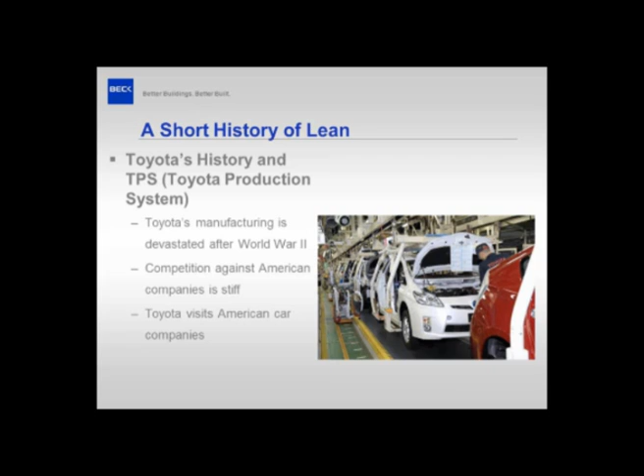So it started in manufacturing. It's a mindset of continual improvement, and you're benchmarking all of these improvements. So it's not just having a retrospective and forgetting about it, but it's tracking this and making sure that you are improving, through some form of data that you can track. Trust in team members is a big part. If you are a supplier of Toyota, it is very crucial that you are a part of lean, but then also that you become trusted as well as you begin to trust Toyota. Predictability, that's something that you'll hear a lot of in lean construction as well as lean manufacturing, is trying to create the most predictable workflow possible.

And then eliminating waste. Toyota went back to Japan, and the group of people that were visiting in America, they went back there, they started identifying what is waste, and they identified inventory as waste. So they started to eliminate that waste, and they were able to gain a lot of efficiencies in that. And then adding value is realizing in your work process what does not add value that you can eliminate as waste, but then also what is a person doing, what is a company doing that can add more value, and predictability lends itself to adding more value.

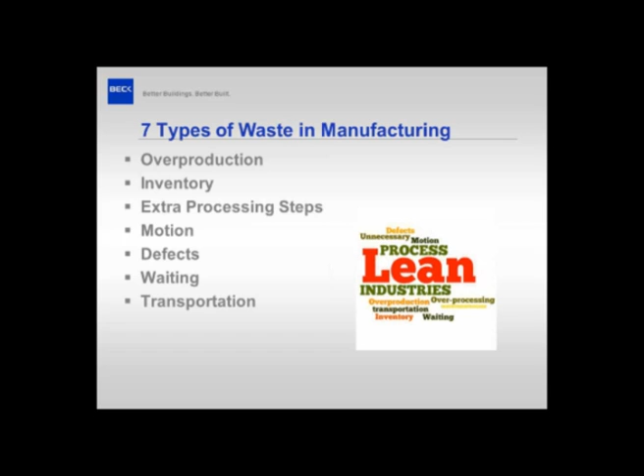There are 14 principles of Lean that I'd like to go over and highlight some of these, but these are very critical, and when I'm teaching a class or when I'm teaching people on this, it's a continuous improvement mind shift. So you've got the tools that you use in Lean, then you've got the cultural change, and then you've got the philosophy of this. And so you'll see some of these carry over in the principles of Lean.

So base decisions on long-term goals, even at the expense of short-term gains. So what they would do at Toyota is they realized that there is a long-term goal that they did not want to sacrifice. And so in the short term, they might have to lose money maybe in a certain quarter or a certain portion of that quarter. Maybe they would gain inefficiencies in that quarter in order to, in the long term, gain overall efficiencies. So it's the idea of really establishing long-term goals and then not caring about gains as much if your goals are the central focus of the organization.

Another one down here is level out the workload. That's something that's very critical we'll see in the carryover from lean manufacturing into lean construction. Build a culture of stopping to fix problems. As we all know, in the recent years, Toyota's had many problems with some of their cars, and so what they did was they stopped everything, went back and fixed everything to make sure that they were still in the process. Lean does not fix all problems. It's not the silver bullet. It's not that if you do lean in manufacturing or in construction that you won't have any problems, but it's establishing a culture to fix as many problems as possible.

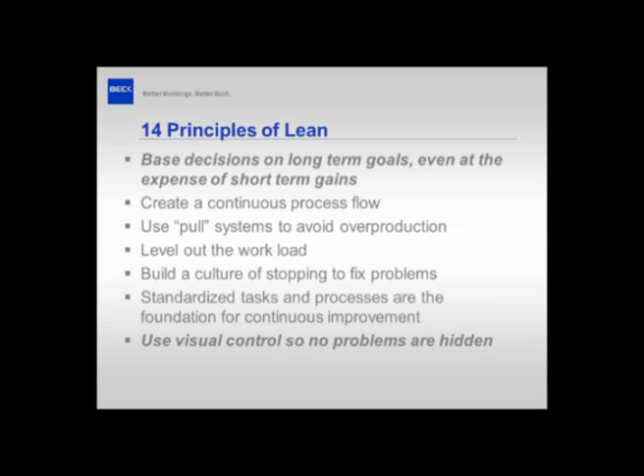And then use visual control so no problems are hidden. This is something I highlighted that we will see in the lean construction side, and you'll see in some of the tools that are used in lean construction.

Grow leaders who thoroughly understand the work, live the philosophy, and teach others. This is very critical. And the story at Toyota is how they implemented the brand Lexus. As we know, that's a very good luxury brand of cars. So they had a long-term goal of realizing that in order to increase their market share, they needed to develop a luxury brand to go after the BMWs and Mercedes and such. So they wanted to develop a very good, outstanding brand that they could bring to market very quickly. So they did not hire somebody from BMW or Mercedes or some of these other well-known luxury car brands.

What they did was they brought in an engineer on the manufacturing floor, and they brought this person up who had been an engineer for many years with them. They understood the principles and the philosophy. They brought him in to really lead the group to establish the Lexus brand. So it achieved two things. One is an impeccable quality for this brand. Then also it worked along with the flow of their other cars that they were developing. So it became a very successful brand in itself.

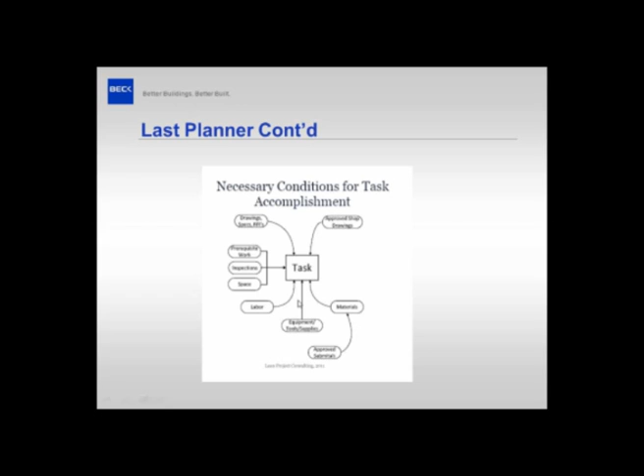So lean is the opposite in that it recognizes there's many problems on jobs and does not ignore them, but brings them to the surface so that you can attack them, you can address them early on, and you don't stop the flow of that task. So we have a weekly work plan.

The weekly work plan is set up by each day. So the task that took 5 weeks, you start planning each day what are you going to be doing on that task. And so we have a key here that we're using at one project where you've got the task that was addressed on the pull schedule. You've got the number of workers to check back with the pull schedule. You've got, then it's broken down to the floor and the area.

So this is much more detailed work here, where every day each team member gets up there and discusses, okay, this is where we're going to be working. And it's a 10 to 15-minute meeting that everyone addresses what they got done, and if they didn't get it done, then why did they not get it done, and so they can attack that constraint or that problem right away.

So we've got each day represented in the columns, and then in the rows we've got the companies that are part of this type of schedule. So these are the company names, and they represent different scopes of work. You can have this in design as well as construction. And so what you do is once a week, you have everybody put up their sticky notes beforehand. You would talk about what you're doing for the next 2 weeks so that everyone can plan their work accordingly.

Here's another way to do weekly work plans, and it's just through Excel. So we've got a similar thing here, and what's shown here in Post-it notes, we've got here in Excel, where you've got the week, what week you're working in, the area, the level, the subcontractor name, or it could be a consultant, whatever phase of the project you're in, whether it's design or construction. The commitment description, the handoff, what you need done, and then our inspections or material delivery included in this. And then you can have the man planned and the man actual that you have each day. So you can check off and confirm that you have done this.

So you could do it through Excel, and you could do it through Post-it notes. And the reason why we start training with Post-it notes is once again, it's the simplicity of it, the visual control, that it's easy for people to catch on, much easier when you do it that way than with Excel. Excel is more advanced, and if people can understand Excel in that format, and if they're comfortable using it, then you can use Excel. So both ways work fine.

So percent plan complete is something that I just alluded to, and I want to talk about this. So you train the teammates, whether they're consultants or subcontractors, you train to all aim for a percent plan complete rate that you're all going for as a group. And so what you do is it's a simple math where you take the items that you have done that week and you divide it by the items that you have planned for that week.

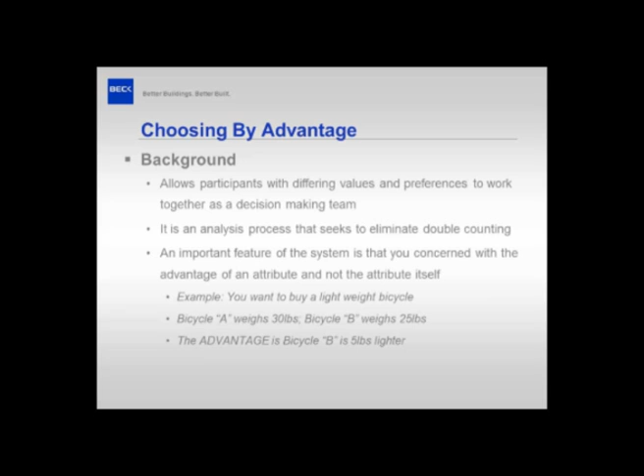Maybe it's a detail of a door that you're drawing, and you want to evaluate many different decisions on this, and so you want to track all the variables that affect the drawing of this door. And so you want to weight those accurately and not double count the different variables that attribute to that design. And I have an example here of a spreadsheet that I can show you. An important feature of the system is that you're concerned with the advantage of the attribute and not the attribute itself. So you're really focusing on the advantages that they bring to the table.

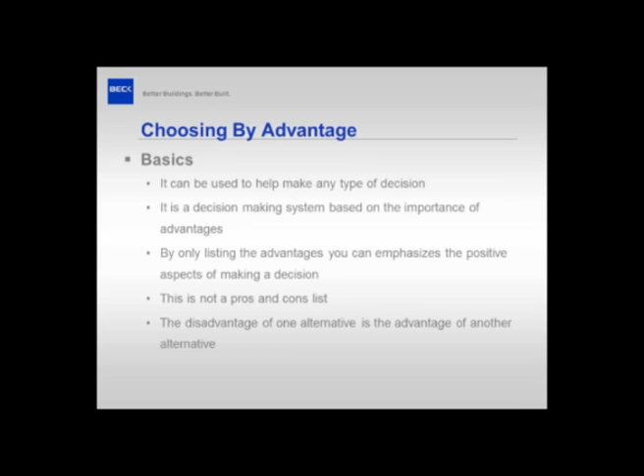It can be used to help make any type of decision, like I mentioned, personnel decisions or design decisions. It's a decision-making system based on the importance of advantages. So once again, you're really focusing on the advantages and what each variable can bring. And then the last one, the disadvantage of one alternative is the advantage of another. So you're really looking at these. So here's a spreadsheet that a director here at Beck uses to evaluate people that they're interviewing for project manager roles. And it's a very intense spreadsheet when you first look at it.

But over here is the criteria that they look for in hiring someone. And then they equate certain types of points to each of those variables. So it could start off with maybe 3 or 4 that you realize, and then over the process of several different interviews, you realize, wow, okay, this criteria is important. Let me put that in there.

So you track all these different criteria that you look for when you're interviewing someone. And you weight those based on all of these different criteria, so that it can start calculating a score. And so then it automatically starts showing in a scientific way who is most qualified for that position based on this score, so that you can really focus on the 2 or 3 people that filter to the top, and not really concern yourself with the other people

that you may have thought were higher. But this is a way to continually use in your processes and add to this and keep changing. So this is choosing by advantage, a great way to evaluate decisions.

Target value design is another one that's used on the design side that I'll go through here, and it really utilizes the team. In target value design, you bring a team together at the beginning of a project in construction, and you have everybody design to the goal. Target value design is itself a group decision to target which values you see as very important to the process. So it could be budget, it could be schedule, it could be design awards that you're pursuing, it could be end user values.

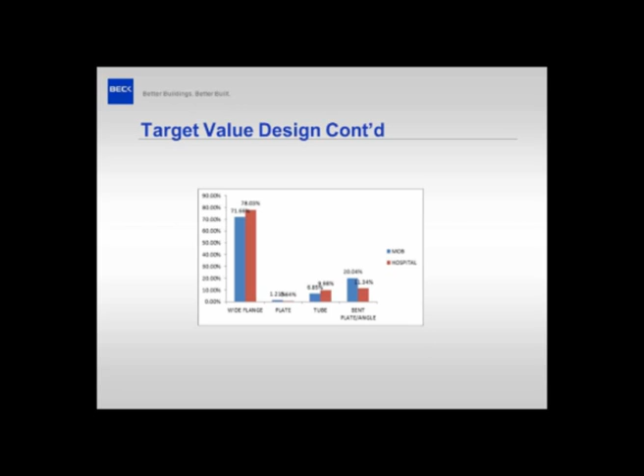And so as you can see, our percentage of bent plate and angle was 20%, almost double the percentage of what we had in the hospital. We had many budget issues with the MOB because of that. There was not as much collaboration, so we had to add a lot more miscellaneous steel in there to make up for the lack of coordination. So a very clear picture of target value design and how it can work.

And then value stream mapping is another tool that you can learn. Identifying current processes in place, and this can be used with anybody, whether you're in the office or in the field. Communicate the new process that you have all analyzed and then work towards that new process.

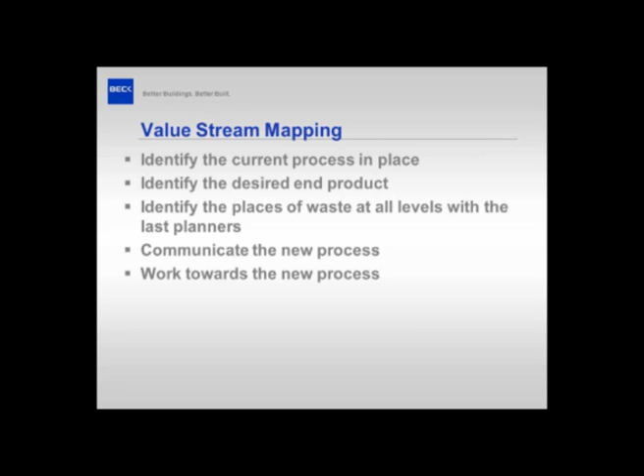And you analyze this, you create a workflow for this, and then you start, as I mentioned, working towards the new process and saying, okay, this is what we decided as a team, let's start implementing this. So this flow processing can be used in, maybe it's processing billing, maybe it's the way that you write contracts, maybe it's the way you hire people, trying to reduce the amount of steps as much as possible. Once again, going back to lean principles and your motion in your work that you do.

Quick and easy Kaizen is a great way to do this, and it's not a suggestion box, but it's a way to write down an idea that a person who is doing actual work has, and then this person actually tests that piece of work and they come up with the report themselves. So they have some pictures here of they were receiving these in individual count, and then they started receiving them as groups, and it gained a lot more efficiencies this way. Higher quality is what was talked about here, implemented. And this is at a manufacturing environment.

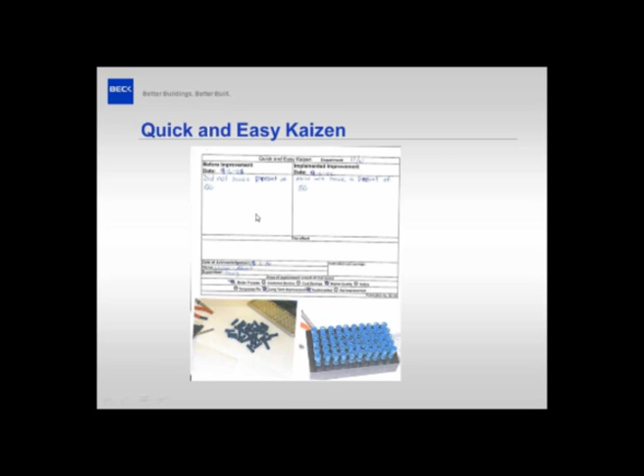So you can do this in construction. You can do this, maybe it's evaluating people's reviews or whatever the process is. But it's not just for people to come up with ideas, but it's a great way to have people come up with the ideas, but then test them and say, okay, this is the result of the test. This is why we see it as a value. And they can present that. They can post them on walls so that management or people who are a part of teams in management that identify new processes can take these and learn new processes that people have developed, and then they start implementing these new processes in the organization.

And then 5 whys, asking why 5 times. It's another great tool to really help problem solve, because many times we start solving problems that really aren't the root problem. And so we get done with solving the problem and we realize that it really hasn't fixed the problem. So you ask why 5 times. And basically, when you ask the first why, the process is to jot down all the responses to that first why, and then ask your second why to each of those responses, carrying it all the way down to the root cause analysis. So whether it's in the weekly work plan, the pull planning, and any of the tools in Lean, you can implement 5 whys.

So those are some tools for Lean construction that I hope were helpful to you and educational. So I have a few moments for questions and answers. Does anybody have any questions? We do have one that has come in.

It says, how or why is it better to use Excel for weekly work plans if not everyone can continually see and interact with the Excel-based schedule at the same time? Doesn't this invite the probability of having multiple versions of the same weekly work plan existing at the same time?